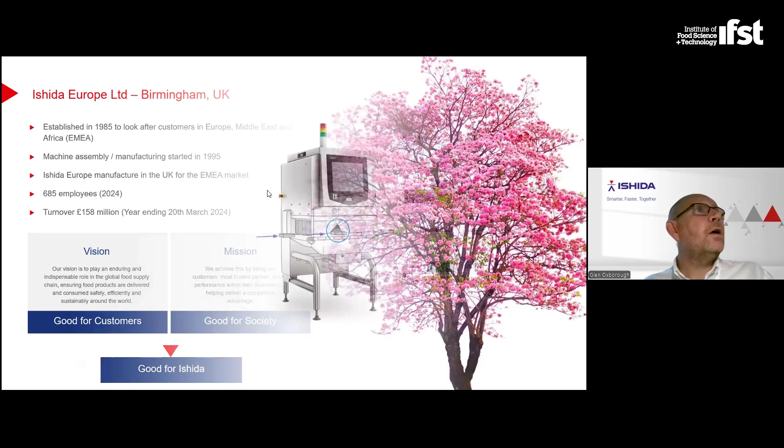Now, I don't want to get too technical too quickly, but when we're talking about X-ray machines, we need to understand a little bit about the theory. So, for anybody that's not familiar, this section is just a very brief overview on the basic functionality of how an X-ray machine works. Because we need to understand this when we start to look at the differences between the different types of models and the different types of technology that are involved.

So in simple terms, a product enters the X-ray machine from an in-feed conveyor, passes through the X-ray beam, which is here. Beneath the conveyor here is a detection mechanism. So the detector receives the amount of X-ray that is passed through the product. That generates an image on the screen, and then software analyzes that image and looks for anomalies and foreign bodies within that image, and then a decision is made as to whether that product is good or bad. So in simple terms, that's how an X-ray machine works.

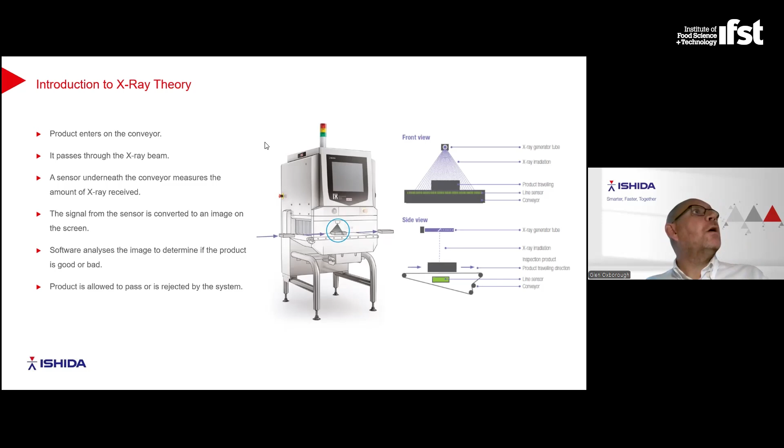Now, when we drill down into this, we get down to the component level. And in terms of hardware, when we're looking at different model types and different machines that are available on the market today, we need to have an appreciation of the different hardware components that are involved and the impact that they have on how the machine operates and the level of sensitivity and the types of foreign bodies that are going to be reliably detected.

So the two main components for any X-ray machine are going to be the X-ray tube, so that's the item that produces the X-rays, and the detector, so that's what receives the X-rays and then creates the image that's on the screen. Now we're going to go through some of these in more detail as we go through the different machine types and the types that are available.

But in essence, in terms of the X-ray tube, there are two main types available, either a beryllium or a glass, and we'll talk about the differences between those. And then depending on the model or the manufacturer or the machine type, different X-ray machines will have different amounts of power. And the power of an X-ray machine is measured in watts. And if anybody remembers their school physics, they will know that watts is voltage times current.

So that power in watts is made up of the kV, kilovolts, which is the penetrative power of the X-ray, so how much power it's got to push through the product, and the milliamps, which is the quantity of the X-ray that's produced. Typically, for a thicker product or a more dense product, you need a higher kV to push through the product to get the right amount of X-rays onto the detector to create the image.

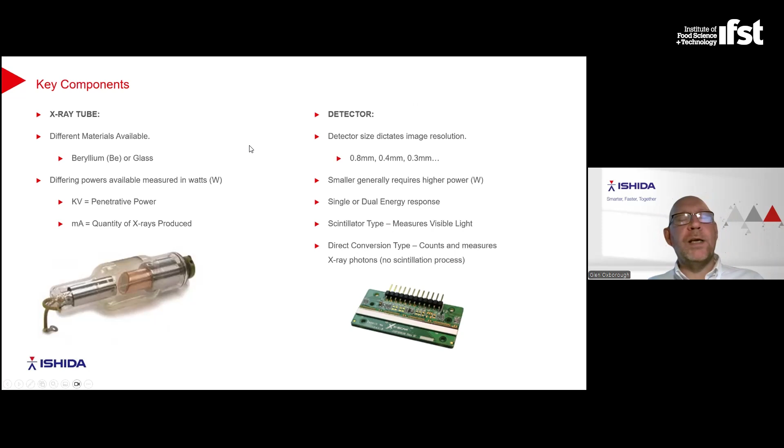There are different types that are available that we'll talk about. There's a scintillator type and a direct conversion type, and we'll cover those in more detail. So these are the two main components that we need to be generally aware of when we look at different model types.

So in terms of the scope of X-ray machines that are available on the market today, we have a standard single energy machine, higher sensitivity single energy machine, dual energy, and the latest in innovation and the latest technology on the market, which is called direct conversion or photon counting. Now, as Ishida, we supply machines in all of these different segments, as do many of our competitors in the market. So whilst I'll be talking more specifically about Ishida in terms of the technologies, what we're talking about here applies across the broad spectrum of X-ray suppliers.

So standard single energy machine, typically a glass tube type, and we'll come on to that as we drill down into this a bit further. Typically lower power machines, good for metal detection and high density materials. Typical applications for the standard single energy are end of line primary package product, generally where the customer's looking to achieve a set level of sensitivity, whether that's their internal standards or set upon them by their customers, be it a retailer or whoever, where they cannot meet those standards with a traditional metal detection system. So that tends to be metal detection replacement.

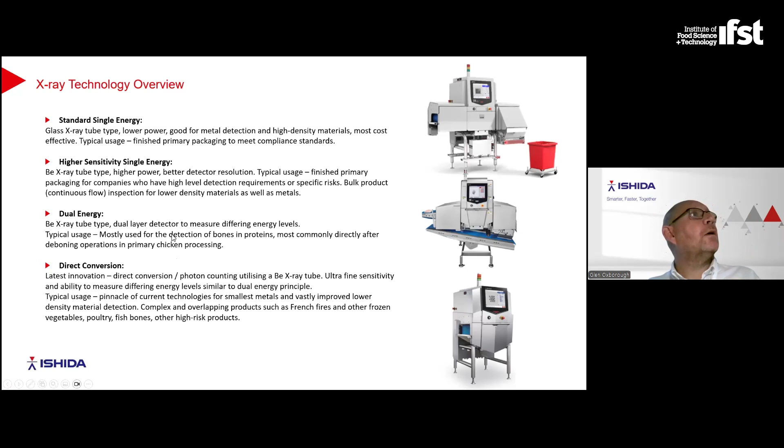So, standard single energy system. This typically has what we call a glass tube. Now, the glass tube in an X-ray, as we touched on to start with, is what produces the X-ray that passes through the product. And a glass X-ray tube is the most cost-effective in terms of the production process in making that glass vacuum tube.

The downside of having a glass tube is that the X-ray has to physically pass through the glass before it can come out into the atmosphere and then enter through the product. And that creates a filter, effectively. So a glass tube will by nature filter the lower energy spectrum. And there are some disadvantages with that, but it really depends on the foreign body.

Standard single energy systems typically tend to be lower power, in the region of 150 watts, down to as low as 50 watts. And the standard detector resolution is somewhere in the region of 0.8 to 0.4 millimeters. And that's something that, when you're talking to different manufacturers, you need to understand about the detector resolution. And again, this will differ depending on the supplier.

But typically, if we're looking at metals and stainless steel in particular, in most applications you're talking somewhere in the region of about 1.5 times the detector size as to what's going to be reliably detected. So in our case, we use a 0.4 millimeter detector. So in most cases, we'll be detecting down to 0.6 millimeters, sometimes 0.7, 0.8. But that 1.5 times multiplier is a reasonable indication as to what might be achievable depending on the product.

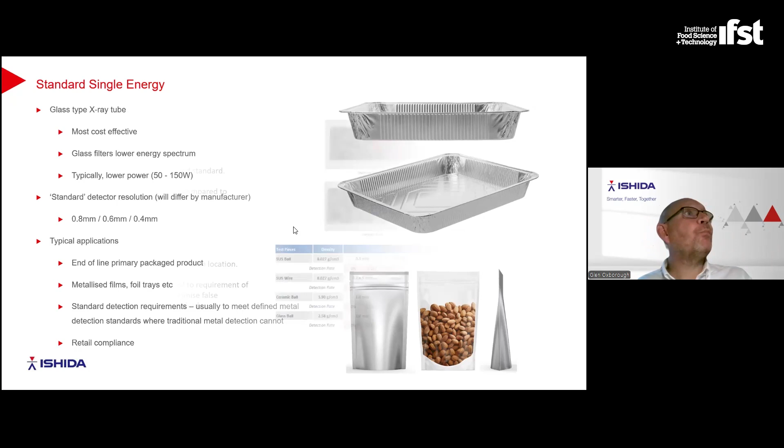And the results that we were able to achieve on that: consistent detection down to 0.8 millimeters, down to 0.6 on occasion, and down to a 3 millimeter glass, 4 millimeter ceramic, which was more than enough to meet the customer requirements. So you might think, okay, what's the benefit of being able to go down to 0.8 when I need to get to 1.5?

Well, this is where the issue around the false positive detection comes in. If you're able to source a system that is able to exceed your requirements by a reasonable margin, we then have a nice big gray area in between the capability of the machine at 0.8 millimeter consistently and what the customer target is at 1.5 millimeters.

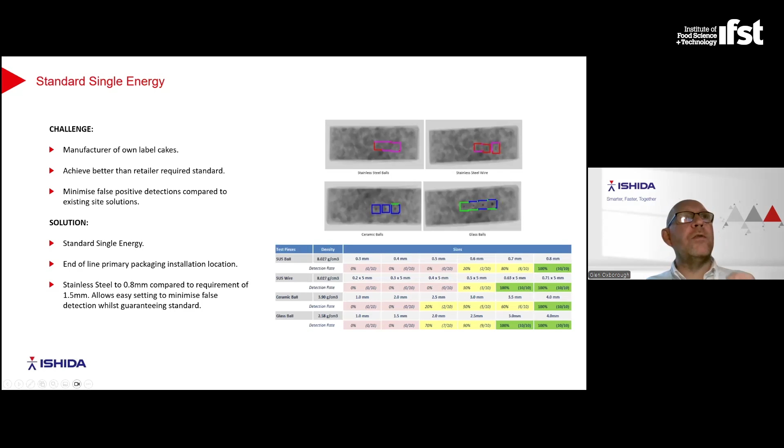So that allows us to set the sensitivity somewhere in that gray area to give us 100% confidence that we're going to hit that 1.5 millimeter requirement each and every time, but be so far away from the actual performance level of the machine to ensure that the false positive level is an absolute minimum. So this is a really nice application for a standard single energy system. The detection requirements are basically industry standard. We can achieve those very easily with a very simple standard system.

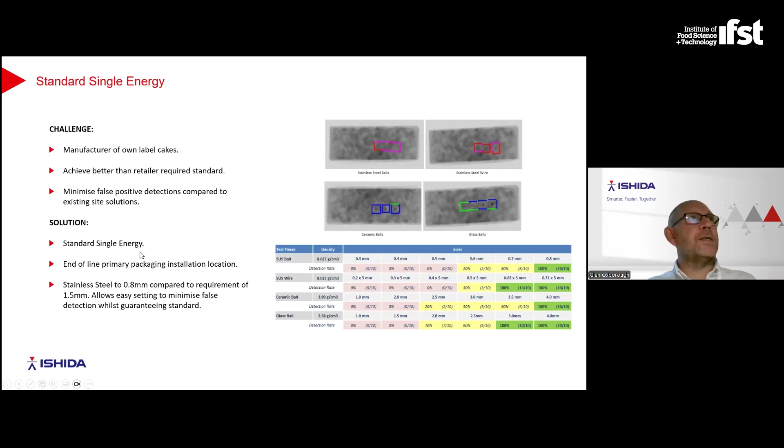Now, if we move on to the higher sensitivity systems, these are often in the same or similar applications to those for the standard single energy, but where the customer has a specific foreign body requirement, or they want to achieve the highest level of sensitivity that they can with a reasonably cost-effective solution. Now, a higher sensitivity system will typically use a beryllium tube compared to the glass.

Now, we spoke before in the standard section about the glass tube. Here we have a beryllium tube. So rather than the glass where the X-ray passes through the glass, there's a window here made of a material called beryllium, and the X-rays pass through that window and then out into the atmosphere. And that's effectively invisible as far as X-ray is concerned.

Now, you might be able to see the differences between the two images that we have on the screen here. The one on the left is taken with a beryllium window, and the one on the right is taken with a standard glass window. And this is both with exactly the same product. So with the beryllium, you can see we're getting a much clearer defined image, much better resolution around the edges of the product.

But more importantly, or better to explain the difference between the beryllium and the glass, is around the edge, you can actually start to see some definition from the packaging, where we don't see that on the standard single energy system with the glass tube. And that's because the glass filters out the lower energy spectrum, as we've said. The beryllium does not. The lower energy spectrum is then starting to respond to the packaging, so hence we're able to start to see that in the image where we're not with a standard system. And that's where the lower energy comes in.

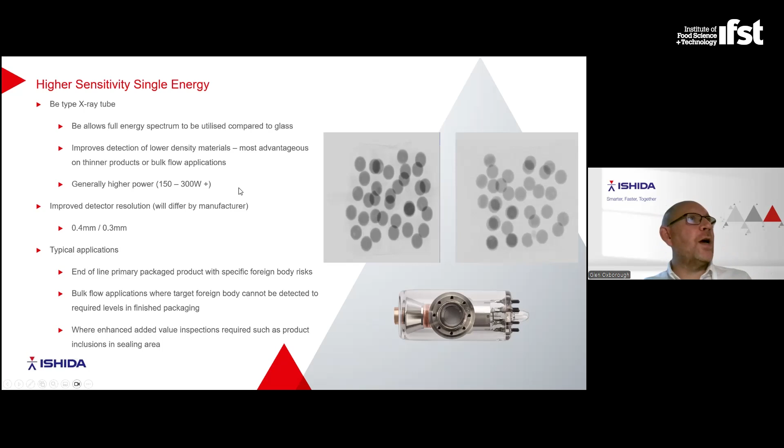So if you imagine you've got a tray with a heat seal around the edge, you'd be able to use the higher sensitivity systems to pick up very small product inclusions within that sealing area because the low energies are able to respond to the sealing area and give us some definition around the edges of the tray that would not be achievable on the standard single energy systems.

So a couple of application examples here. So this was a manufacturer of own branded chocolate biscuits.

And they really wanted to achieve as high a level of sensitivity as was reasonably possible, as well as the ability to have additional quality inspections. So we can see here on the cake example, we were up at 0.8 millimeter. Okay, this is a different product, but we're down to 0.5 millimeter stainless steel. But what's more impressive is in terms of the lower density foreign bodies, we're down to a consistent ceramic detection of 2 millimeters, 1.5 millimeter glass, and then able to pick up much lower density materials such as Teflon and EPDM rubber as well.

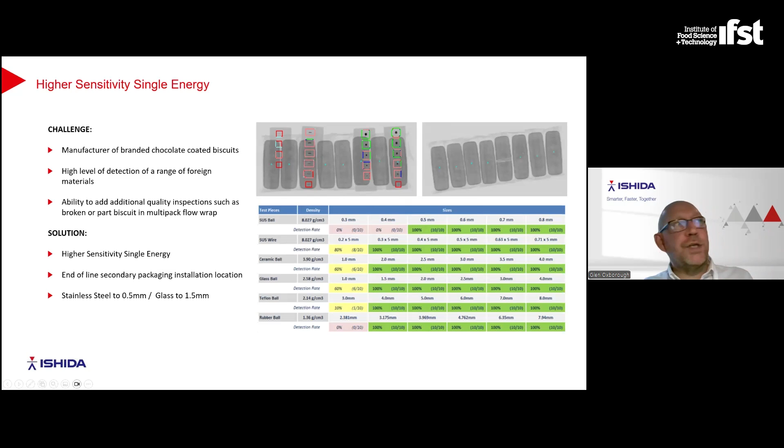And we can see from the images here that in this example the little blue dots indicate biscuits of the correct size and shape. And here we have one biscuit that's cracked and broken that again the machine is able to differentiate. And again, as we said, you can see some definition from the packaging around the area there that would not be achievable on the standard single energy systems.

Moving on to a bulk flow application. So this is a particularly interesting one. This is from a coffee bean producer, and they wanted to achieve the best level of stone detection that they possibly could. Anybody that's involved within the coffee industry will know that stones are an inherent risk within that product. So they originally came to us and said, okay, we want to inspect our final bags. But they do up to a 5 kilo foil bag, which we can do, not a problem. But in the 5 kilo bag, we were able to achieve a stone detection of about 3 to 4 millimeters consistently. And actually, they wanted to get down significantly lower than that.

So what we proposed was rather than to do it in the final packaging, was to do it in bulk. So in bulk, we've got a thinner layer constantly flowing through the machine. And getting down to that layer enabled us to get down to a stone detection level of 1.5 millimeters, which actually is in the region that they wanted to achieve. So that's an example of not necessarily focusing on the primary packaging. That might naturally be the place where you want to install a machine, but actually, depending on what the foreign body is and the size that you want to be able to detect, it might not necessarily be the most effective location to do that. So that's a good example there.

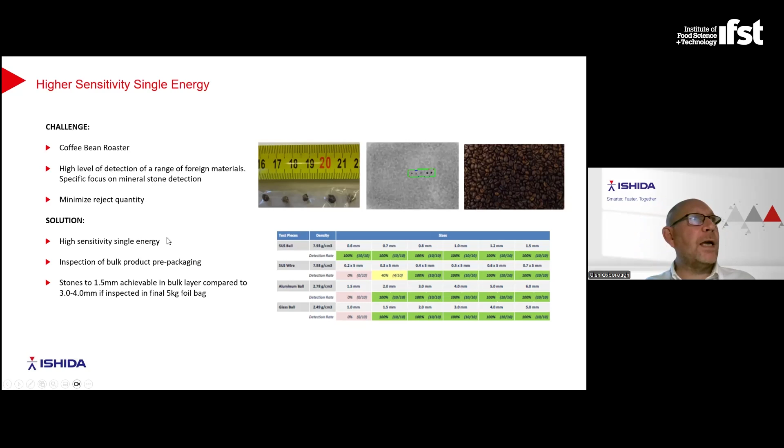Moving on to dual energy. Now, dual energy is where we get a little more technical, and I will try and make this as simple as I possibly can. So here we see on the left a standard single energy system or a higher sensitivity system. So here we have our X-ray generator. This is our X-ray beam. Our product passes through, and we have a detector underneath. A dual energy system still uses one X-ray source, but has two levels of detector underneath, one responding to a high energy signal, the other responding to a low energy signal. And because we're using high and low energy, we can't use a glass tube, because as we've said, the glass filters the lower energy spectrum, and we need to utilize that with a dual energy system. So this machine uses a beryllium tube.

So we take an image at high energy and an image at low energy. And the reason for that is different materials, as we can see from the chart down here, respond to different levels of energy. So when we produce X-rays, we're talking kV in terms of the power that's available within the X-ray tube. But when we convert those into actual X-rays, they're measured in keV, so kilo electron volts. So this is the energies of different keV, and this is how the different materials respond. So you can see with metals, regardless of where we are on the energy spectrum, against the baseline here, metals attenuate very well, so are easy to detect whether we're using high energy or low energy.

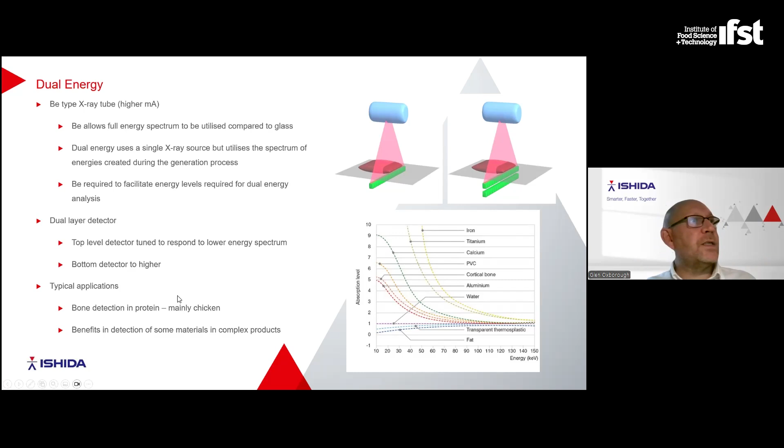So this is an example of a dual energy system. So this was a processor of poultry fillets. So this wasn't a site where they processed themselves. They bought in material and then diced and trimmed or whatever, and then sent that on to further processing. But they wanted to inspect the incoming raw material, make sure it was bone free before they then sent it on for further processing.

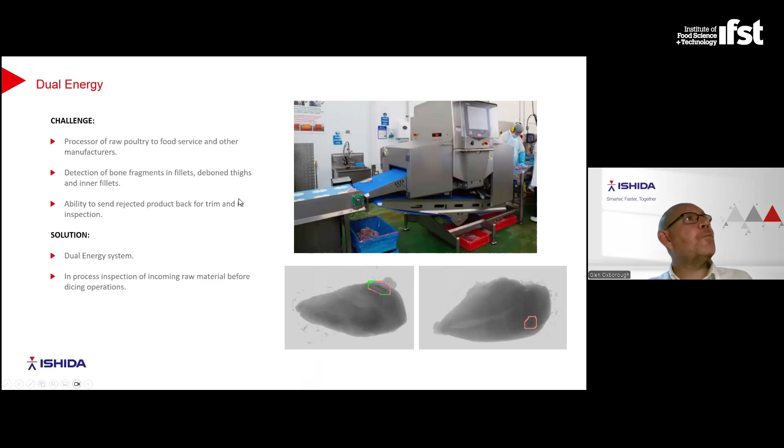Now, if we move on and look at where we are in terms of the latest technology, we can then talk about direct conversion or photon counting, as we refer to it. Now, all the machines that we've spoken about up until this point use what we call an indirect conversion process. So the detector that we've spoken about doesn't actually measure X-ray as such.

As the X-ray passes through the product, and then when we get to the surface of the detector, there's a material called a scintillator. And what the scintillator does is it converts the X-ray into visible light, and then a photodiode or a row of photodiodes that make up the detector will then measure the amount of visible light that's produced and then use that to create the image. Direct conversion doesn't use that process, so it removes the scintillation process. With the scintillation process, we're adding some additional noise into the image. And by removing that process, we're getting a much more clearly defined image at a much higher resolution.

Now, the benefits of that are a much clearer, more defined image, as we've said, but also it's the scintillator that's the wear part on these traditional detectors. So you actually get a much longer life from the detector as well. Much higher resolution than any of the machines that we've spoken about up to this point, and the ability to measure the amount of energy of each X-ray photon to improve upon the existing dual energy processes.

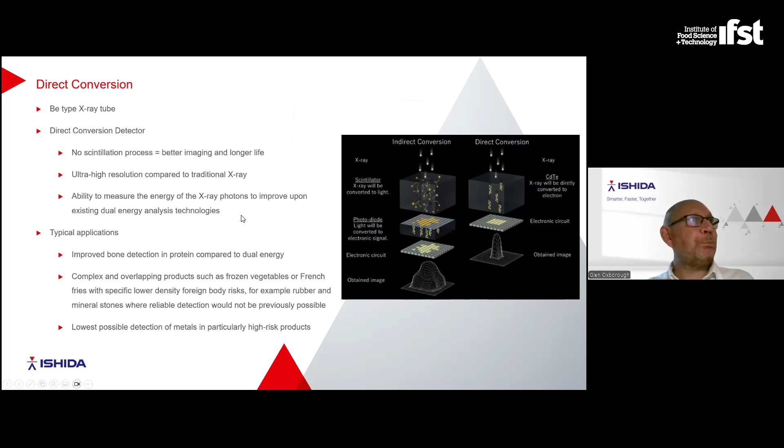So this is some examples comparing the different levels of detection that's achievable. So this is the IXPD, which is a direct conversion system. This is our GN system, which is our high sensitivity single energy system. So not the baseline, but the next one up. So here we're on our 0.3 millimeter ball, as we said, where we're detecting 0.5. Quartz glass at 3 millimeters down to 1.5.

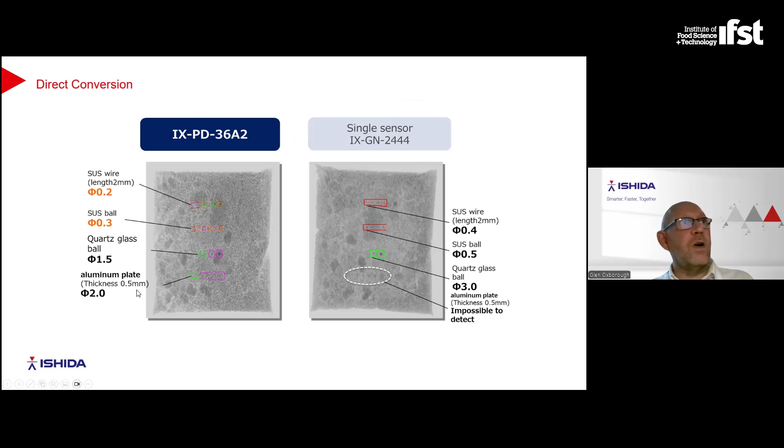And here we have some aluminium. So these are plates at 0.5 millimeter thickness. And here we can see they're not even visible on the image. So impossible to detect with a standard system, but we're able to get down to a 2 millimeter diameter plate at 0.5 millimeter thickness. So very impressive results.

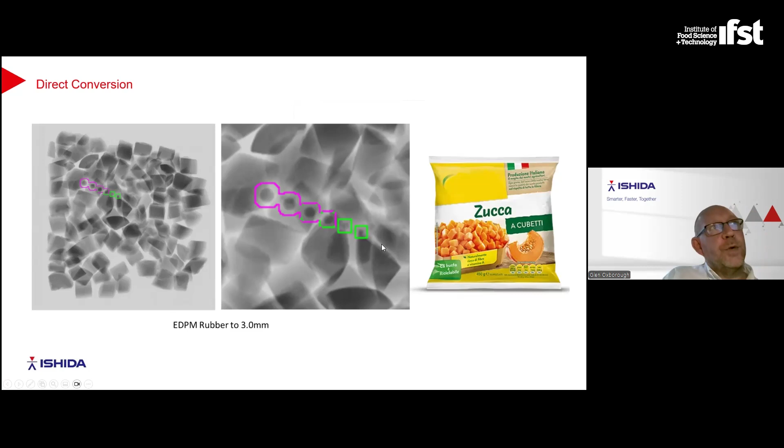What's probably more impressive, we spoke about complex and overlapping products. So this is some frozen vegetables in a bag. So we can see again, many complex and overlapping densities and shapes. So challenging from a traditional X-ray point of view. And this is an EPDM rubber. Again, smallest test piece we have is down to 3 millimeters. And you can see the densities here. There are other areas in the product that are clearly more dense than even the largest part, but yet the machine is able to differentiate those down to 3 millimeters.

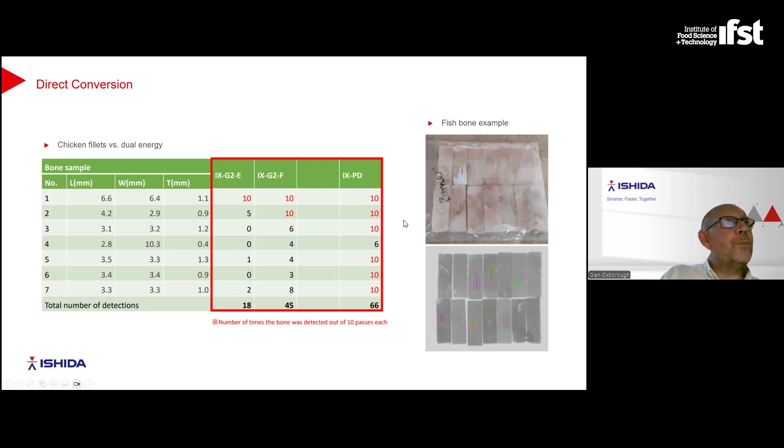So in terms of a quick summary, and I appreciate there's a lot to take in here. The main takeaway, I think, for me at least, is that there are a wide range of different technologies available within the X-ray market. I think it's often the perception that an X-ray machine is an X-ray machine, and that's not the case within the Ishida portfolio, and it's certainly not the case within the wider market. There are a range of different technologies that are available to suit different applications and different customer requirements. Detection capabilities depend on the level of technology employed. Well, that would probably go without saying.

From a customer point of view, I think it's important that when we're talking to suppliers about X-ray machines, we need to be as clear as we can, or at least to have given some thought to what foreign bodies we need to find, what's inherent within the product, what contamination risks do I have, where do they come from, and from a food safety point of view, what sizes do I need to detect those at? So when we're talking to suppliers, we know what we want to achieve, and that then helps the supplier to be able to match the technology level to what those requirements are.

Detection levels will determine the type of technology that's best suited, as we've just said, and the optimum location. So that's an example of the bulk flow as we saw earlier. And if you have the opportunity, test your product with the same foreign body samples on different machines at different technology levels to really understand which level of benefit each technology gives and what's going to be best suited for you as a customer. So standard single energy systems for compliance, specific foreign body risks may require high detection, dual energy for poultry and bones in protein, and the latest is the direct conversion or photon counting, and that represents the current pinnacle.